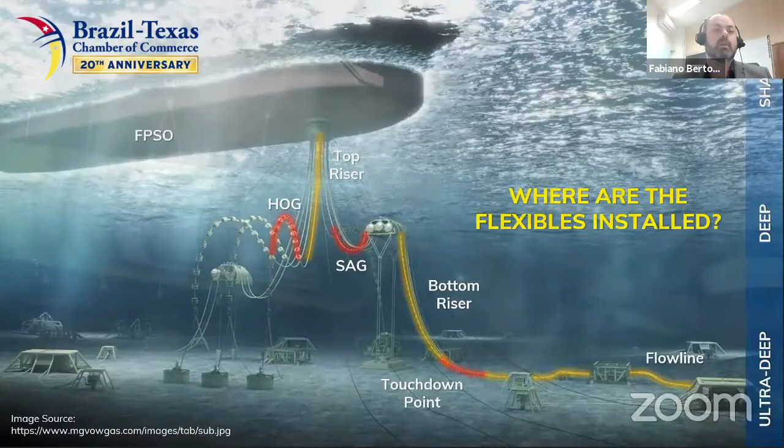Now I would like to show how a common flexible pipe design is. The standard design of flexible pipes consists of metallic and polymeric layers that have their own functionalities. The main pipe layers, explaining going from inside to outside, are: carcass, which is responsible to sustain external pressure; internal pressure sheath, a sealing layer that prevents fluids from coming out; pressure armor, a structural layer that supports internal pressure; tensile armors, in charge of sustaining the axial loads; and external pressure sheath, another sealing layer that prevents fluids from coming in. So the multi-layer pipe structure results in an equipment that has superior structural resistance and leak-proof efficiency for a safe oil and gas production application.

As you may know, despite being seen as field-proven technology, flexible pipes have some vulnerabilities manifested by different failure modes. While most of them are manageable and predictable, some of them still demand further investigation. That is the case for the corrosion and corrosion fatigue failure mechanisms, which can affect the structural metallic layers.

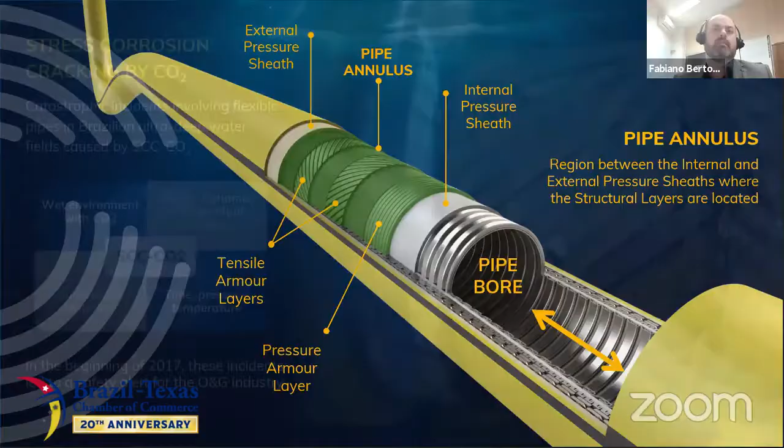Okay, thank you. Let's talk about the main subject of this presentation, SCC CO2. It means stress corrosion cracking by CO2, a failure mechanism well known by the industry.

However, SCC CO2 was not fully mapped by the flexible pipe industry as a critical risk until the recent application in production fields with high CO2. One evidence was the accidents in the Brazilian ultra-deep water fields at the end of 2016 and beginning of 2017 that led the Brazilian National Petroleum Agency, ANP, to issue a safety alert for the industry.

Back then, the first assessment pointed out SCC CO2 as the root cause leading to catastrophic failures of the injection risers and flow lines. As a result, all Brazilian pre-salt oil production was put at risk.

These occurrences sounded an alarm and a call for an industry-wide task force to address some questions such as SCC CO2 mechanism, criticality, and comprehensiveness, and what the boundaries of occurrences are.

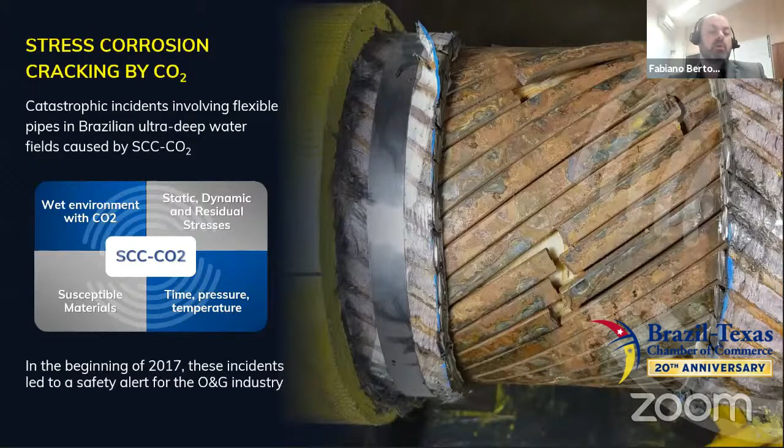Now that you understand what happens in the annulus environment, let me talk a little bit about our solutions to help the industry mitigate the SCC CO2 risk.

SIMEROS is an engineering company for testing, monitoring, and structural integrity solutions of subsea pipe systems. We are leading some initiatives together with the operators Petrogal Brazil, Galp, and Petrobras, and the main pipe manufacturers in order to better understand and carry out actions to pursue the definitive solution to avoid SCC CO2 in unbonded flexible pipes. Here in this slide, you can see a diagram showing how SIMEROS is dealing with the SCC CO2 issue.

Our approach starts with what we call field experience. It can be summarized as initiatives to collect data from retrieved or installed pipes that were exposed to a potential SCC CO2 environment in operation.

SIMEROS understands that field data is a baseline for establishing proper experimental assessment protocols and assertive field monitoring campaigns. Also, the field data corresponds to factual evidence which should be considered as guidance for pipe manufacturers to start the reevaluation of the entire pipe development cycle.

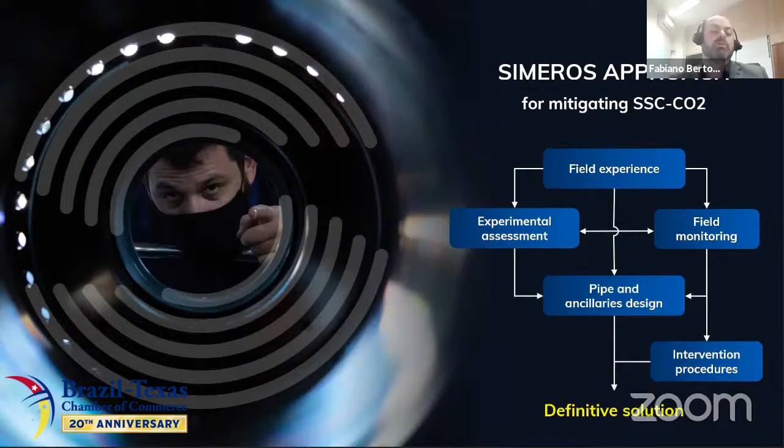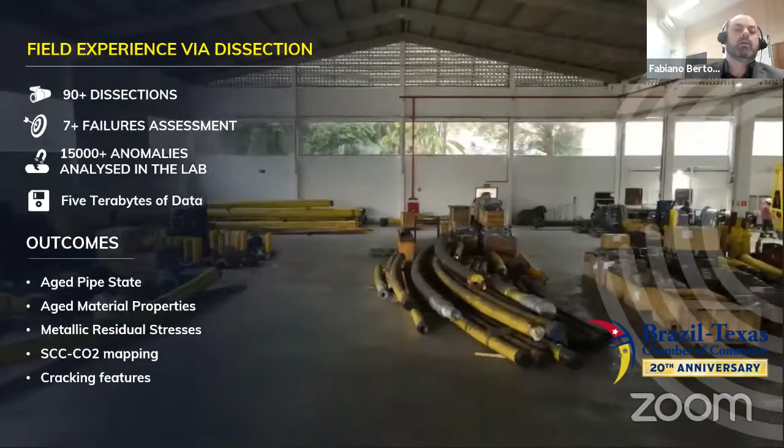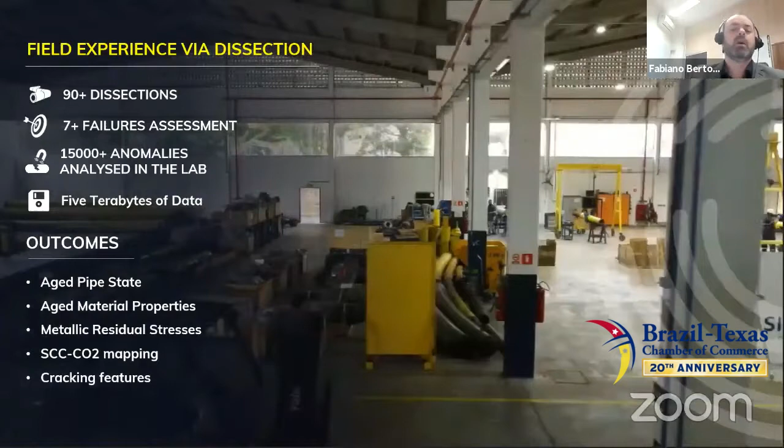Now I will talk a little bit about the pipe dissection program. Pipe dissection program follows SIMEROS approach of field experience basis.

Pipe dissection is an initiative to investigate the SCC CO2 related field occurrences. It's important to mention that SIMEROS has a long-term contract with the main Brazilian operator dedicated to obtain the maximum amount of data from pipes retrieved from fields with high CO2 content.

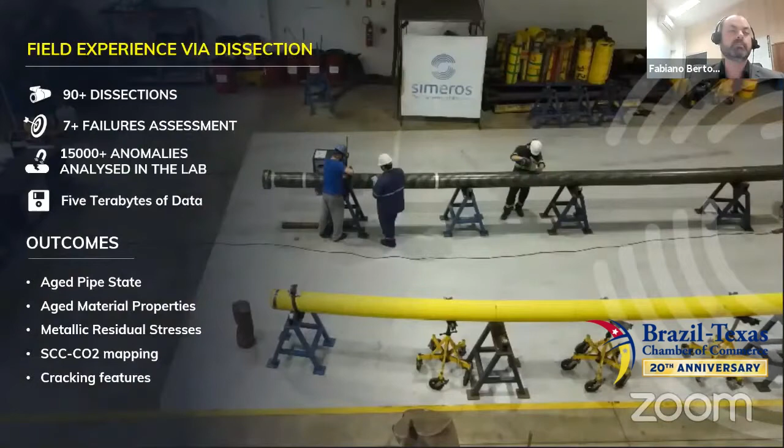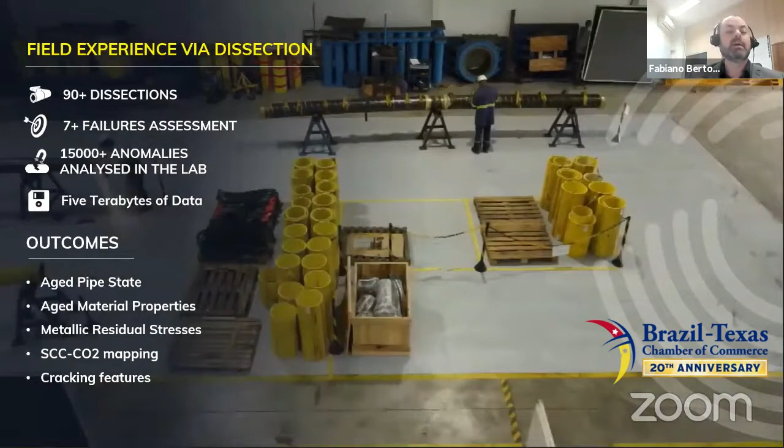First of all, an engineered-based procedure has been developed and implemented to collect information and create a robust database. Then the post-treated data can be cross-linked to evaluate and compare the impact of operational conditions in different pipe structures and applications.

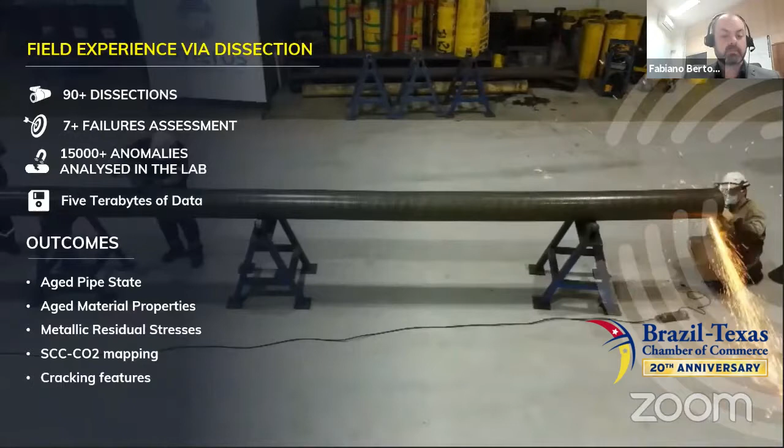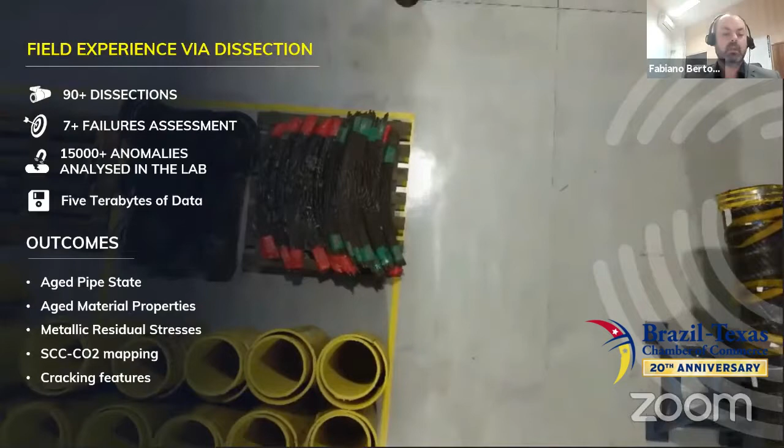The main dissection steps are GVI, general visual inspection, dimensional measurements, non-destructive testing, residual stress measurements, material properties testing, and material characterization. As a result of the dissection process, it's possible to evaluate the aged material properties,

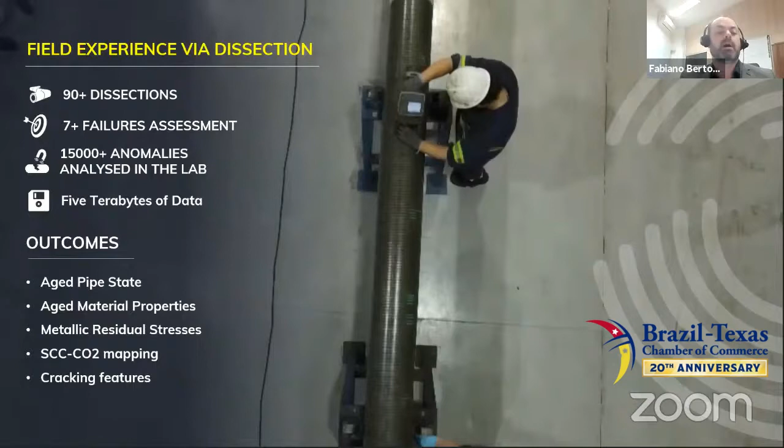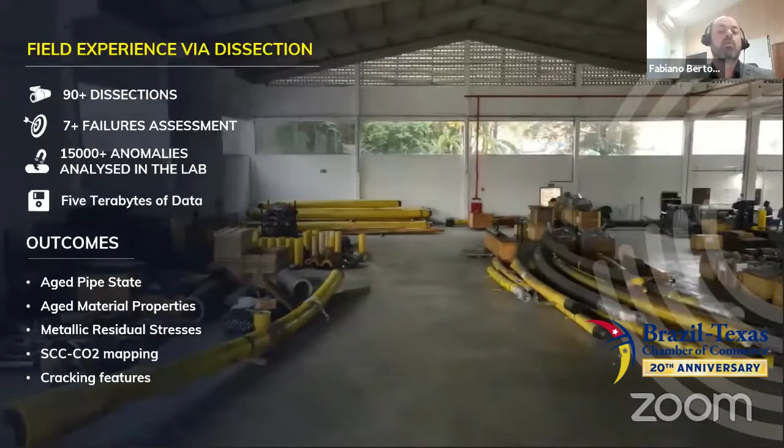to assess the actual residual stress levels in the structural armors arising from pipe manufacturing process and operational loading history, generate a distribution mapping of SCC CO2 occurrences throughout the pipe length, radius, and layers, and generate a statistical data survey regarding the main crack features, such as crack length, shape, position, and others.

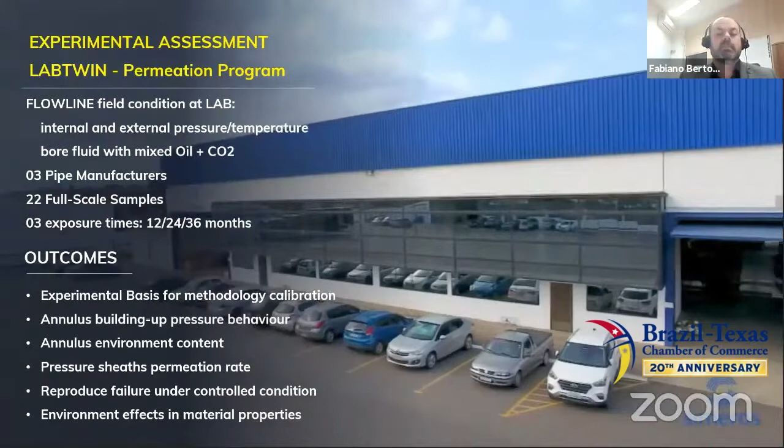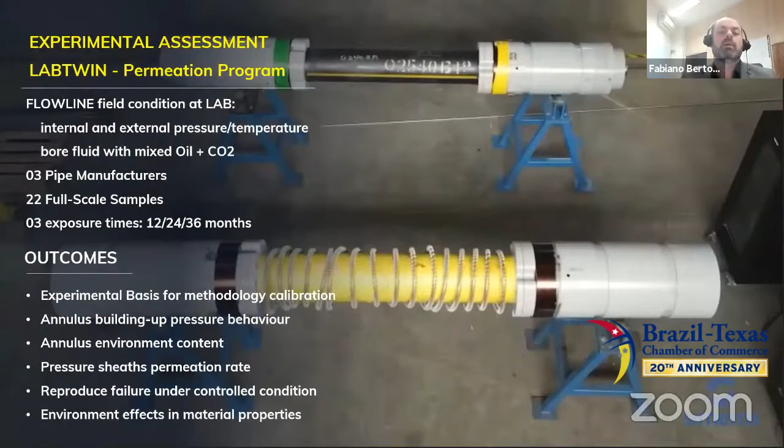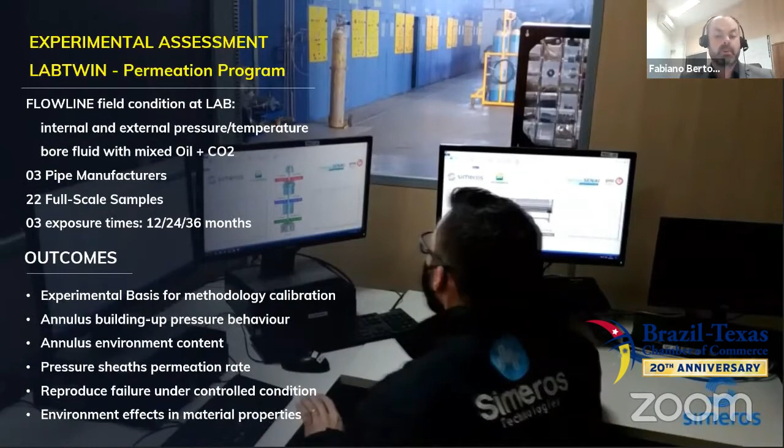Continuing presenting experimental assessment initiatives, this project was born to reproduce as closely as possible the operational field conditions in an industrial lab scale, defined by us as Lab Twin. The primary objective is to develop SCC CO2 degradation mechanism in a controlled environment. The initiative aims to shed light on complex gas permeation properties that take place in the annulus boundaries, remembering that the annulus is the region enclosed between the internal and external sealing barriers.

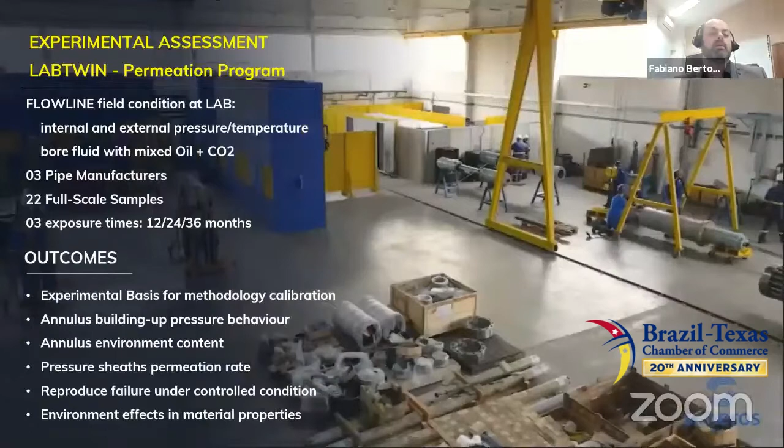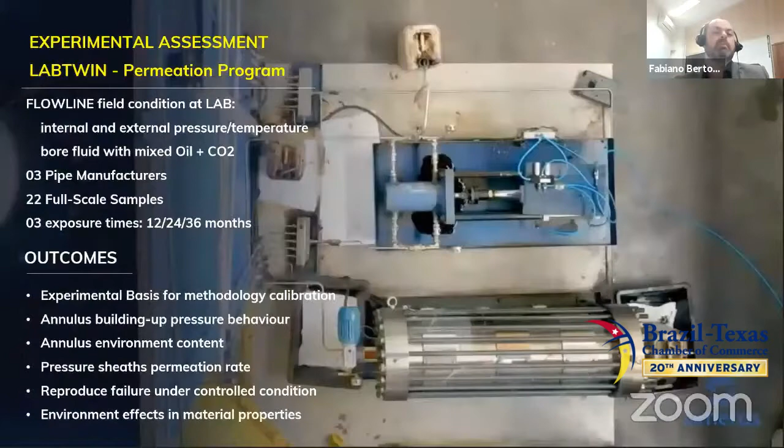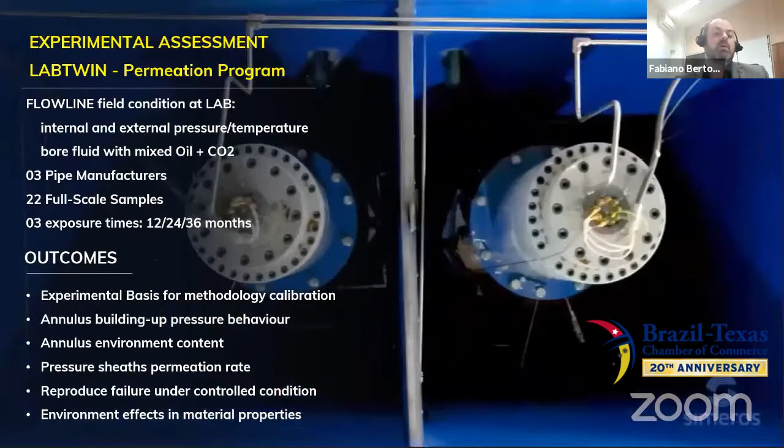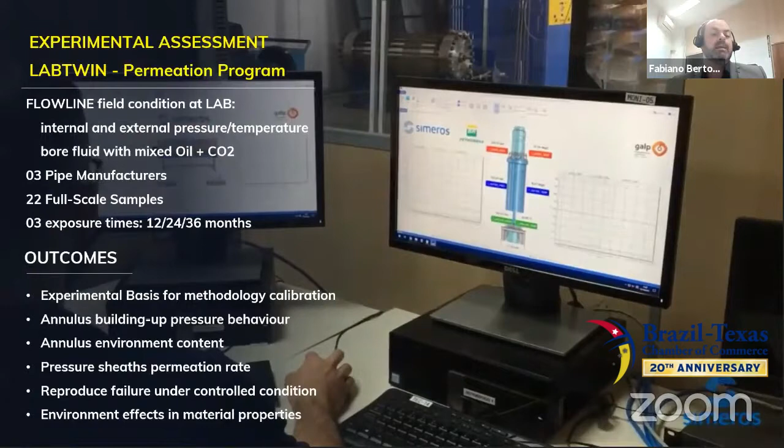Along with our partners, SIMEROS is carrying out the challenging task of assembling 22 full-scale samples in a LABTWIN setup, where the pipes are submitted to near real flow line field conditions. The LABTWIN setup includes controlled bore chemical content, pressure, and temperature, external pipe pressure and temperature. Besides that, the testing matrix considers a combination of 3 different pipe manufacturers with 2 different pipe structures.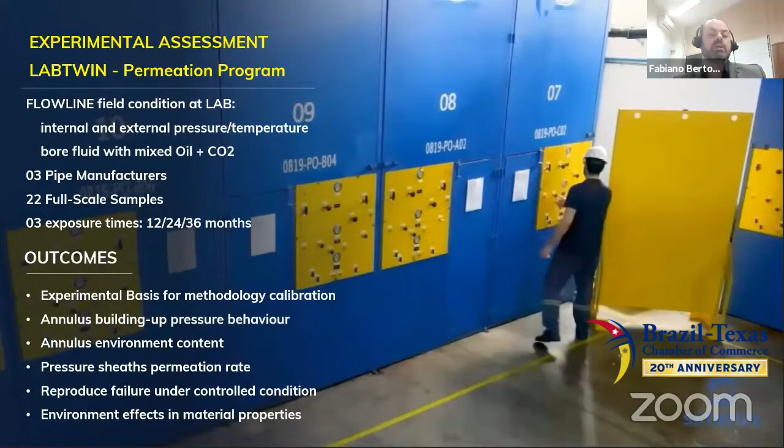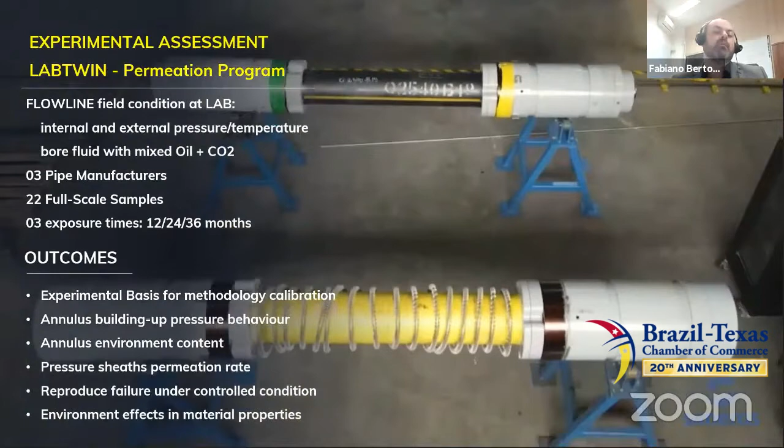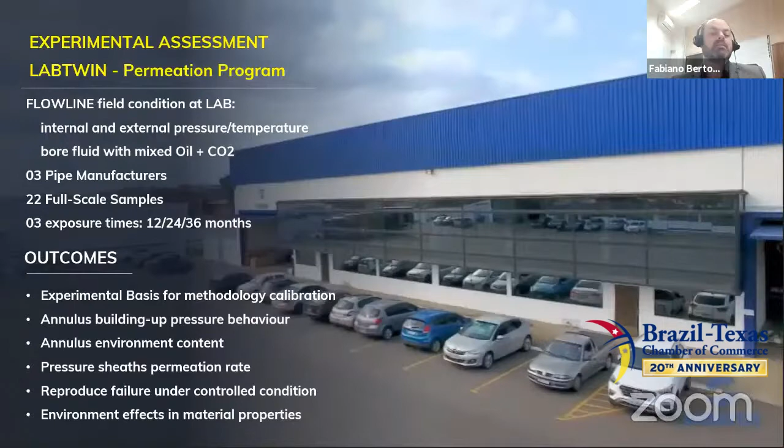These represent production and gas injection applications, and also 3 different aging times: 12, 24, and 36 months. The proposed setup will result in a permeation process that will deliver a characteristic field annulus environment for each sample under laboratory monitoring. The project includes protocols for laboratory instrumentation, monitoring, and dissection procedures in order to obtain the maximum expected results.

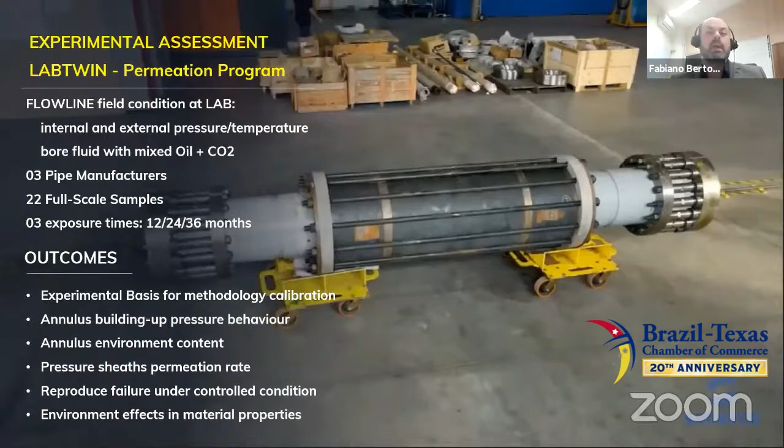The most relevant outcome is related to the generation of experimental basis to calibrate permeation models based on annulus build-up pressure behavior, annulus environment content throughout the exposure time, and pressure sheath permeation rate.

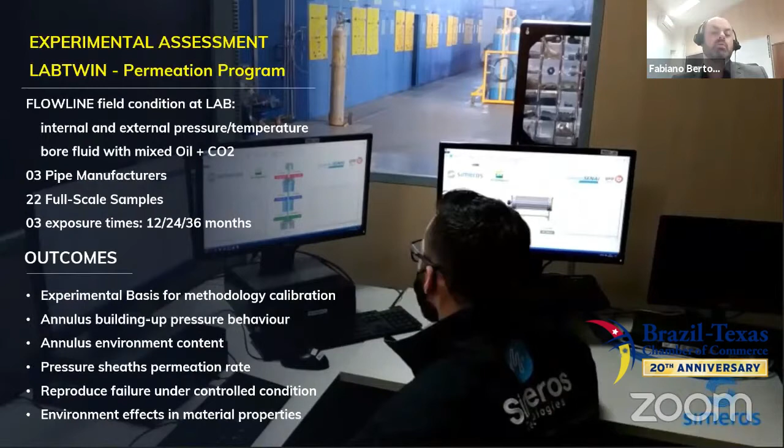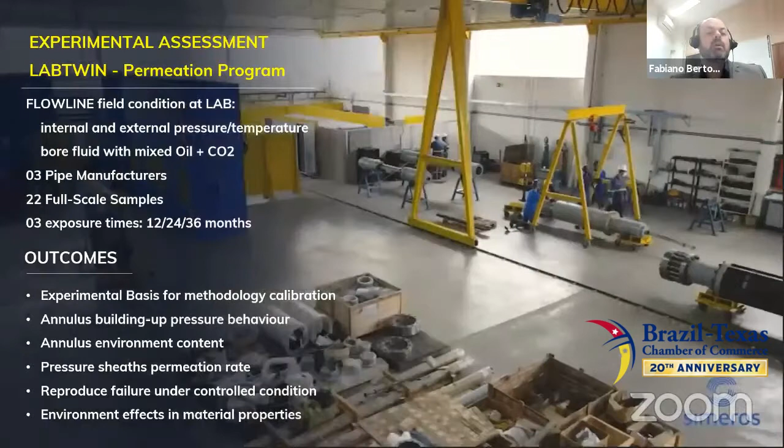Additionally, the project aims to reproduce the SCC CO2 failure mode in the lab under controlled conditions, from initiation until failure. Finally, an evaluation about the effect of the harsh environment on the pipe layer material at different aging levels will be done.

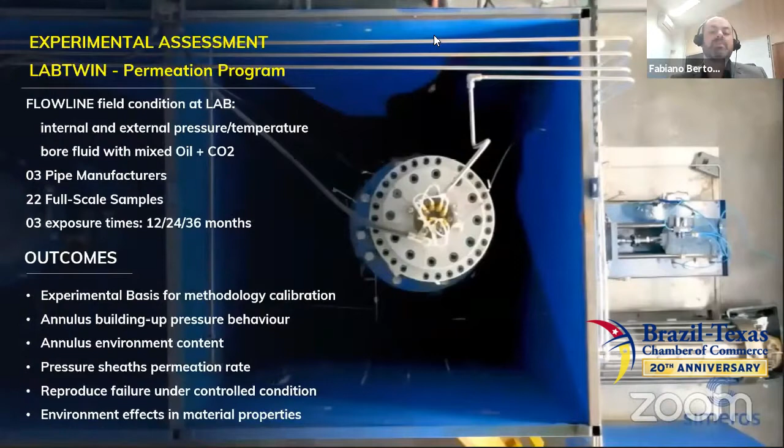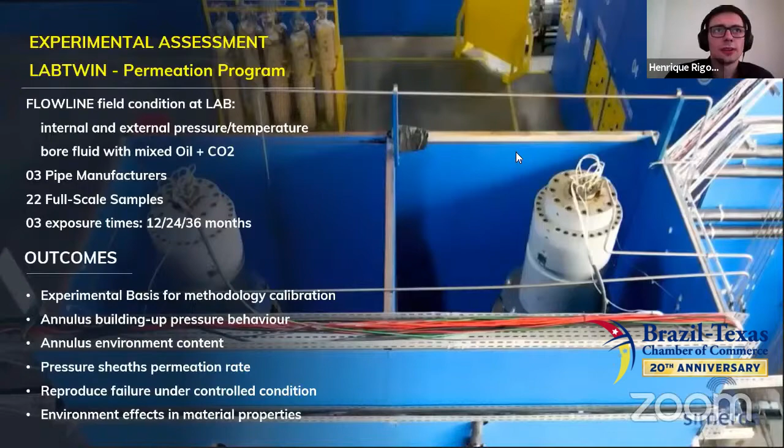Hello, everyone. Following the mentioned initiatives in experimental assessment, SIMEROS is investigating the relationship between SCC CO2 and dynamic loads. SCC damage can be exacerbated by other failure mechanisms, which represents one of the major concerns in the industry. The main concern is that SCC CO2 can quickly initiate damage, which, combined with dynamic loads, may speed up the damage propagation up to catastrophic failure of the structural armor layers. This scenario compromises the safety of dynamic risers operating under high CO2 content, especially when annular flooding is a possibility.

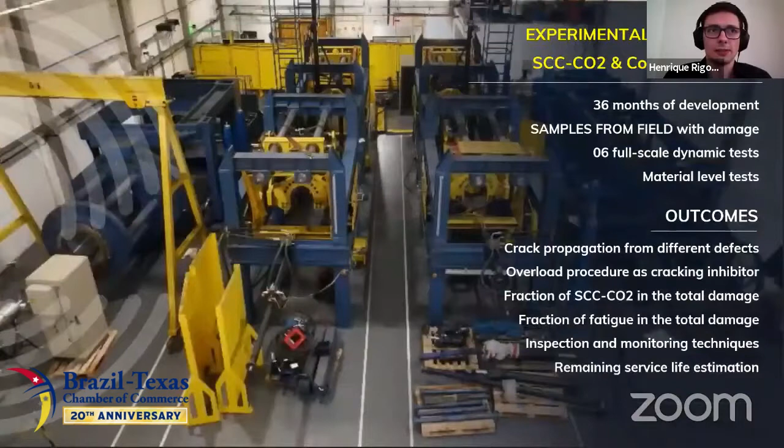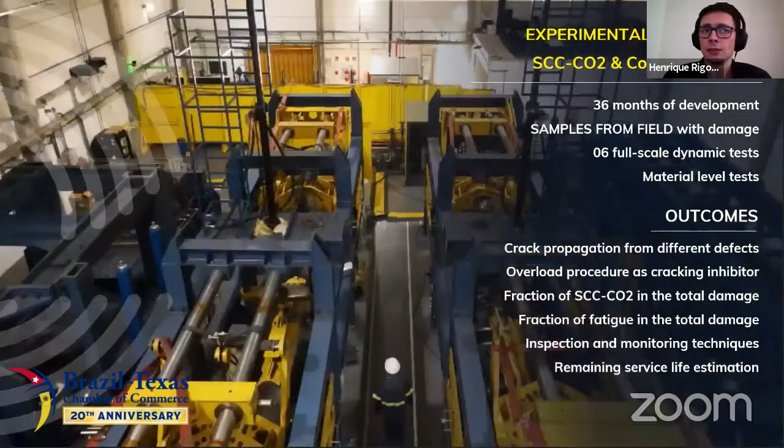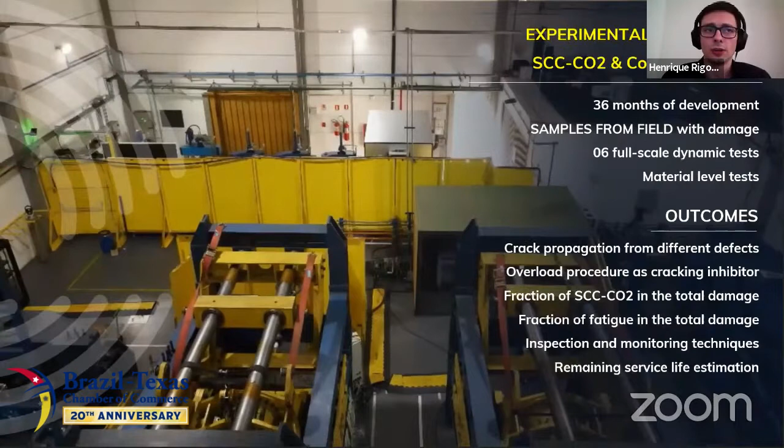We created a project to address these issues, which is a joint effort among Petrogal Brazil, Galp, Petrobras, and SIMEROS. The scope of this project is to perform 6 full-scale tests and a set of material level analysis within 36 months. Pipe samples that were exposed to SCC CO2 during operation were retrieved from the field and will be the core study of this project.

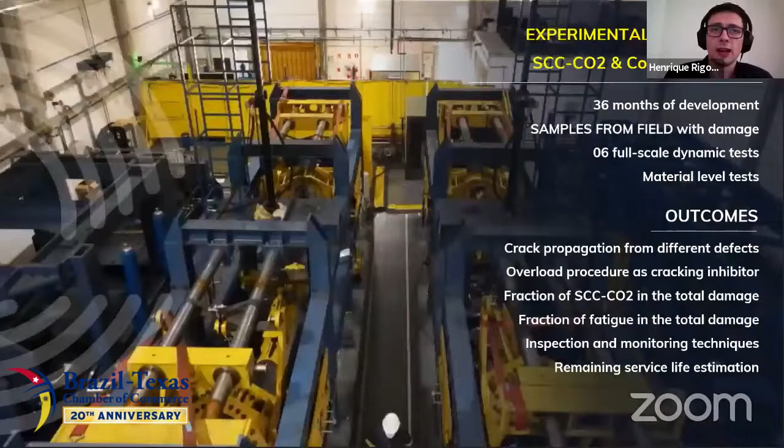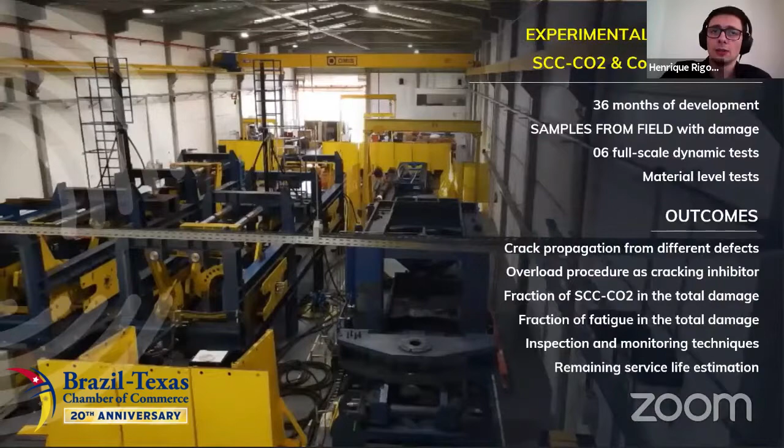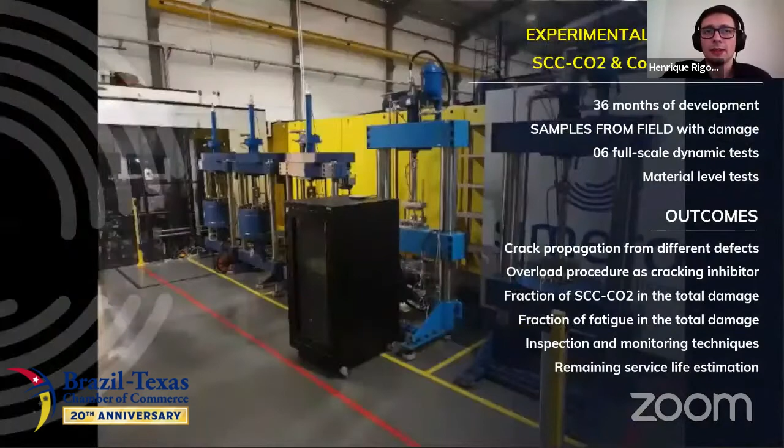These pipes have a high probability of having damage initiation in the structural layers due to the SCC CO2 phenomenon. A dissection process takes place after receiving the samples in order to evaluate the actual degradation state of the structural armors and to confirm the predicted damage. The dissection then delivers a complete defect mapping that is the basis for the following steps of the project.

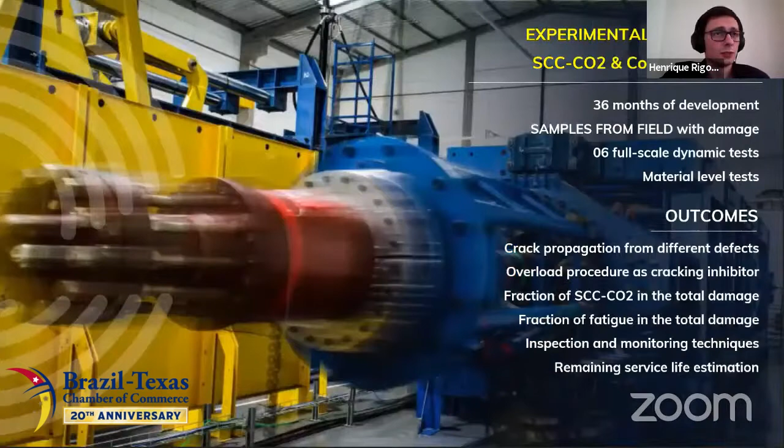After the dissection of the retrieved pipes, we will carry out several experimental assessment campaigns, from material level up to full-scale tests. The goals of these campaigns are to evaluate the crack propagation rate in the presence of different types of defects, and to explore the effect of overload cycles as an option to inhibit crack propagation in the field.

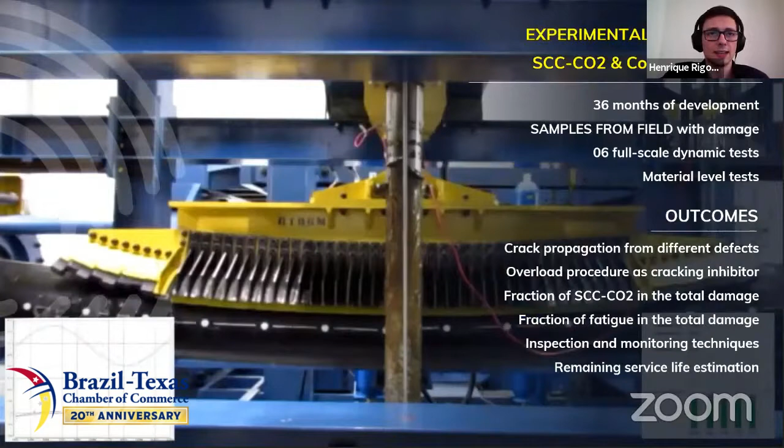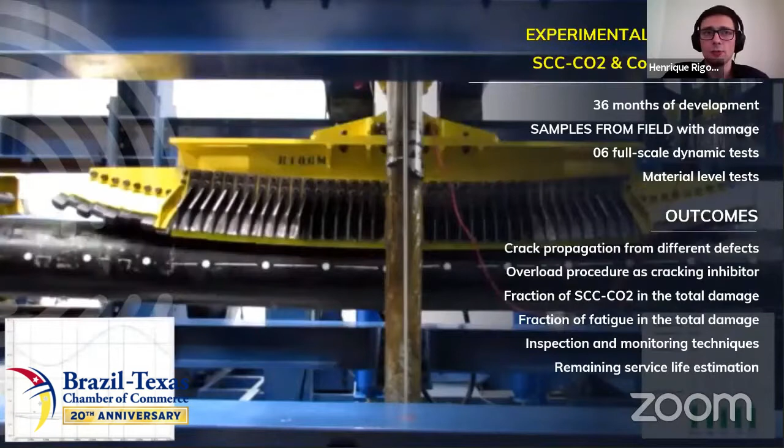We also aim to develop and implement inspection and monitoring techniques that can detect the presence and growth of defects, to investigate and measure the proportion of damage due to SCC CO2 versus the proportion due to fatigue corrosion, to estimate the remaining service life, and also to update the safety factors from the dynamic test data.

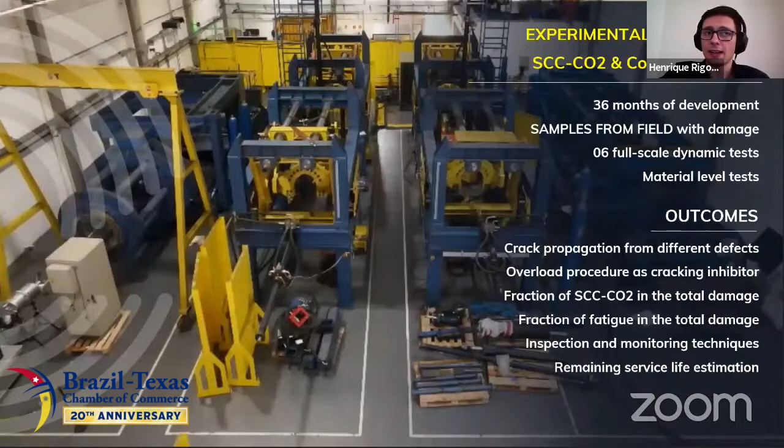This project started at the beginning of this year, and we are currently at the commissioning phase of the testing program.

I will now briefly present the solutions that SIMEROS can offer today for the oil and gas market to mitigate the SCC CO2 issue.

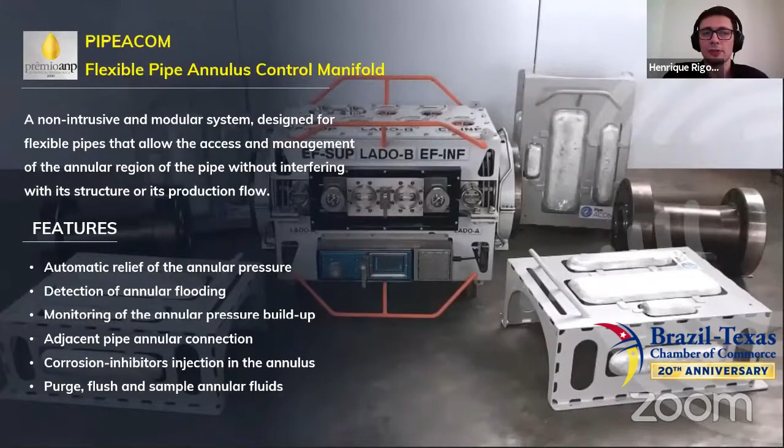PIPEACOM stands for Flexible Pipe Annulus Control Manifold. It is a non-intrusive and modular system designed for unbonded flexible pipes that allow the access and management of the annular region of the pipe without interfering with its structure or its production flow. The system was born to address one of the many flexible pipe weaknesses, that is the premature corrosion of structural layers due to the unknown annular environment that forms during operation.

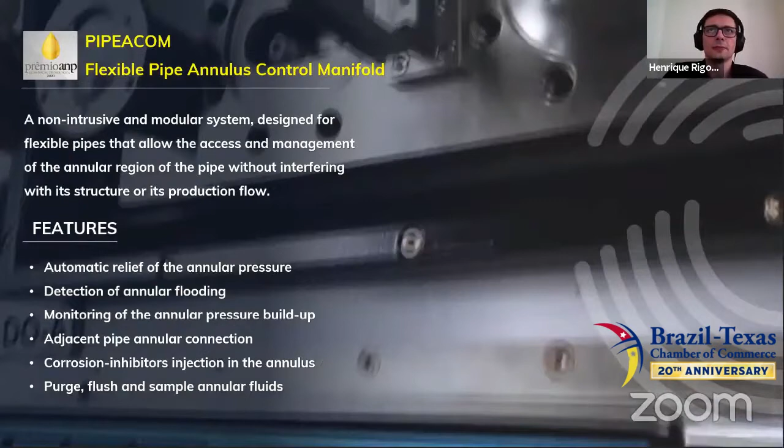Together with Petrogal Brasil, Galp, and Petrobras, SIMEROS went from concept design to a fully operational prototype within only 18 months, qualified to operate in ultra-deep seawater levels of external pressure.

The PIPEACOM system is installed between two end fittings without requiring any modification of either end fitting or flexible pipe. Its circuit is connected to the adjacent annular regions, allowing for complete control of its flow.

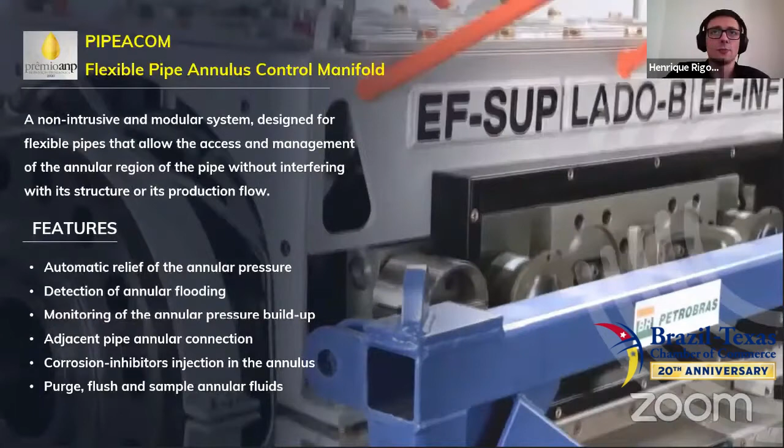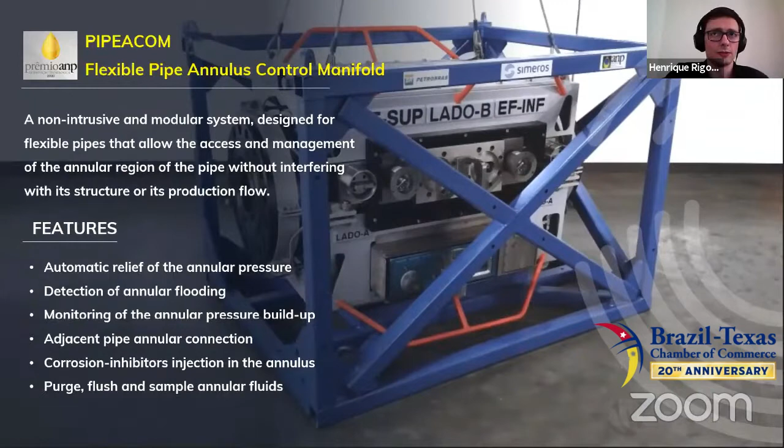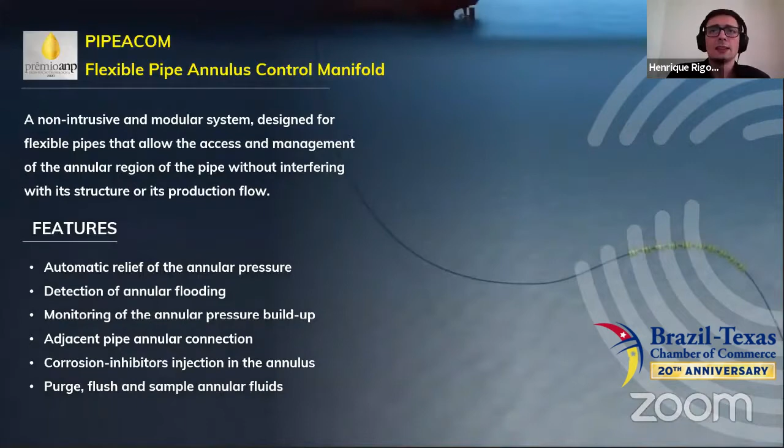With a privileged annular access, the PIPEACOM system can provide innovative features during operation without interfering with the production flow, such as an automatic relief of the annular pressure, the detection of annular flooding, the monitoring of the annular pressure buildup, the connection of the annular regions of adjacent pipe segments, allowing for a unifilar annular circuit, the injection of corrosion inhibitors in the annulus, the purge and flushing of the corrosive environment in the annular region, and the sampling of annular fluids for further content analysis, such as chemical composition and permeation analysis.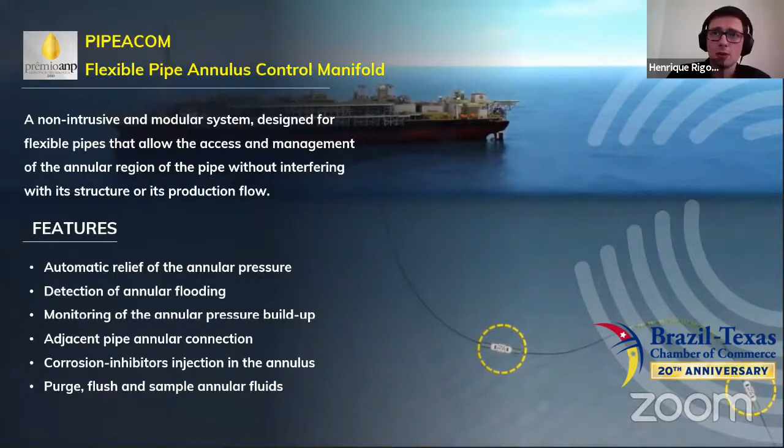The PIPEACOM system was built with reliability and safety in mind, fully compliant with the best practices and standardized subsea systems, with redundant flow control valves and barriers to guarantee water tightness during operation, and a maintenance-friendly interface with fully replaceable safety components and monitoring gauges, all compliant with standard ROV tools.

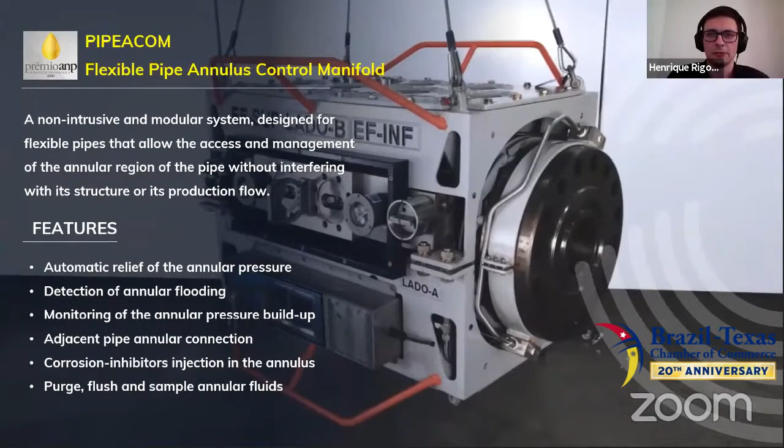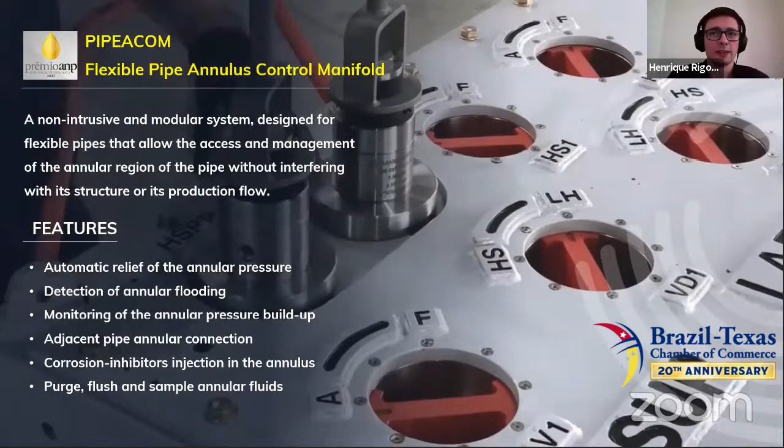After going through strict laboratory qualification tests, the PIPEACOM system is ready for deployment and will be installed in Petrobras P66 platform, located in the Brazilian pre-salt fields, later this month. PIPEACOM will connect two flow line segments under 2,300 meters of water depth.

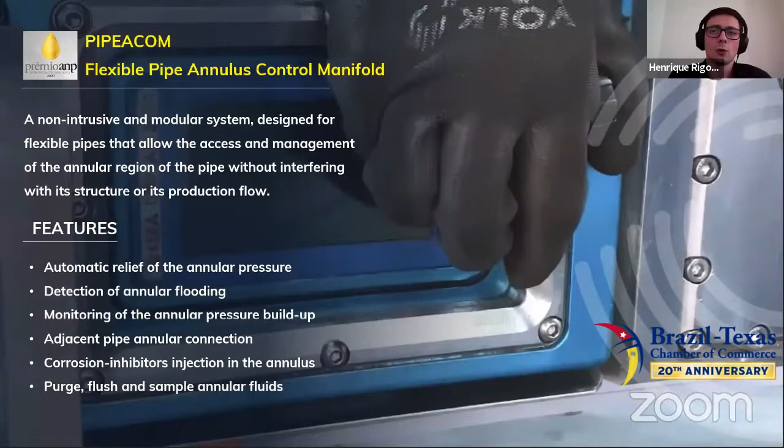This project was so well received from the market that SIMEROS is a nominee for the National Petroleum Agency Technological Innovation Award, the main oil and gas innovation recognition in Brazil.

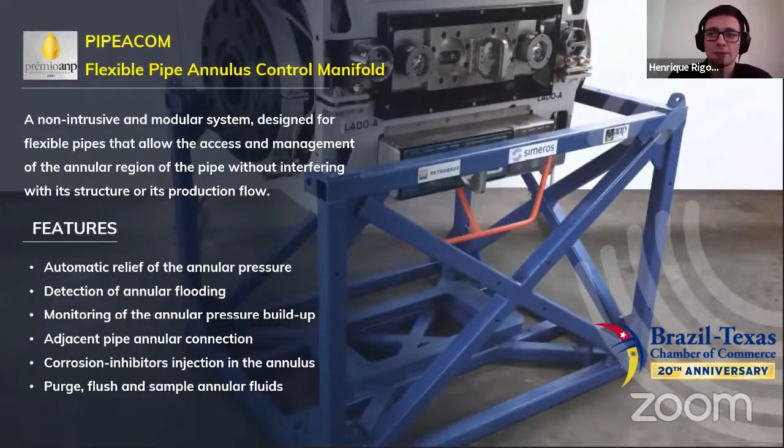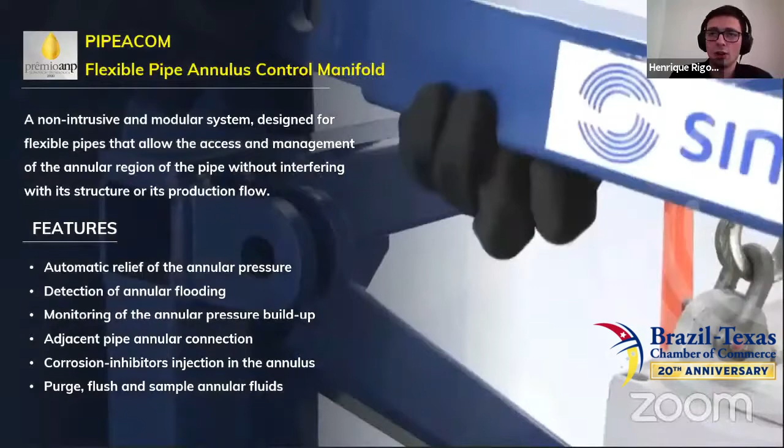PIPEACOM is an independent ancillary device that is attached in completed pipes onshore or offshore bases. SIMEROS already developed a permanent solution for pipe monitoring, including all of the PIPEACOM features, together with pipe structural integrity monitoring.

This is SIMEROS Smart End Fittings. All of the PIPEACOM technology is embedded in our proprietary Smart End Fitting solution. SIMEROS Smart End Fittings is a result of years of research and development.

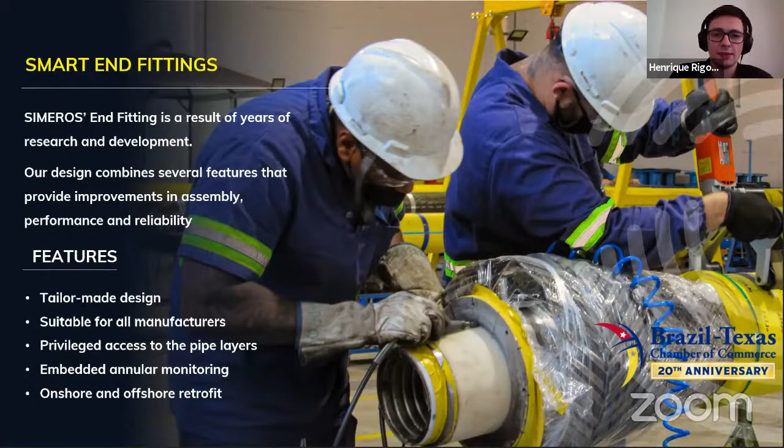With a privileged access to the pipe layers during assembly, SIMEROS end fitting enable a direct and proper instrumentation of the pipe layers and annular environment. It is a key component for the forefront structural integrity assessment of subsea flexible pipes, a valuable technology to monitor the service life consumption of offshore assets.

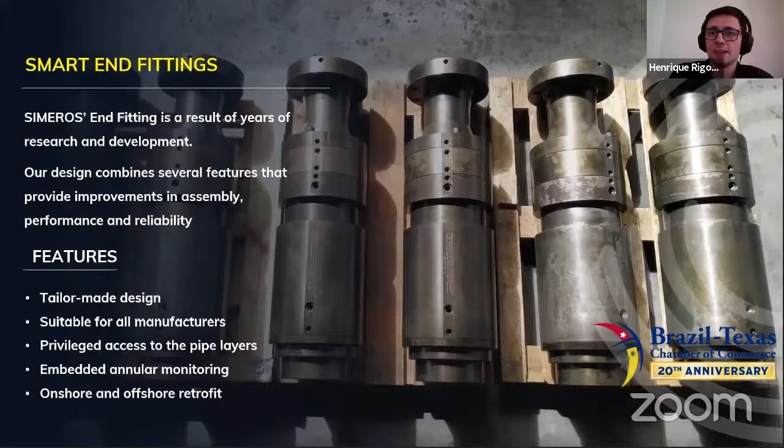Since our end fittings are tailor-made for the application, they can be installed on any flexible pipe of any manufacturer in both onshore and offshore bases.

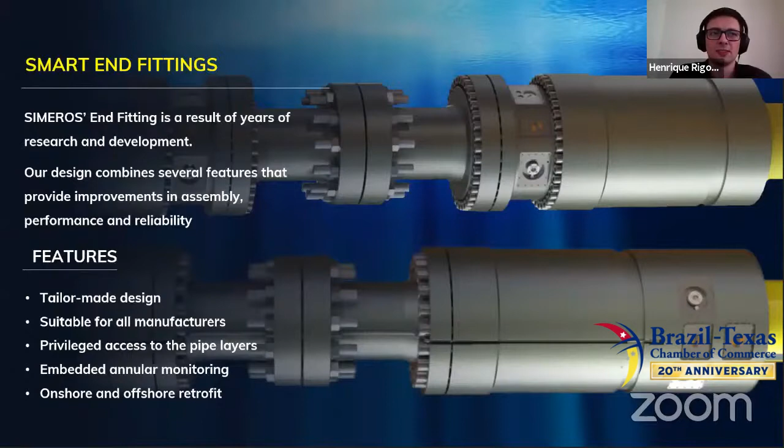Following our initiatives for field monitoring, SIMEROS has introduced to the market a solution for top riser annulus inspection and monitoring, MATS, the Mobile Annular Testing System. MATS allows a real-time survey of the top riser annulus.

MATS offers several features, such as the annular integrity assessment, annular free volume measurements, a permeation rate analysis, sampling and chemical content identification, and injection of corrosion inhibitors.

These services can be performed in several different stages of the pipe's life, from installation up to its retrieval, with a periodic assessment done according to the risks identified in operation.

Currently, MATS is running a permeation assessment campaign, monitoring risers that can be subjected to the presence of CO2 in pre-salt fields, one of the ingredients of stress corrosion cracking failure mechanism.

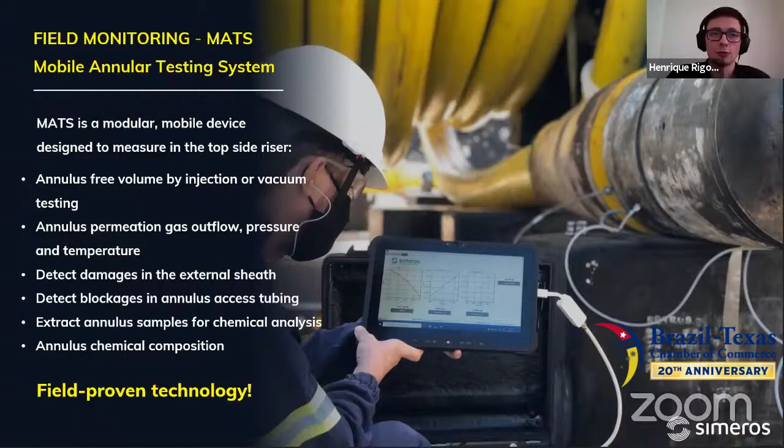Inspection and monitoring techniques are powerful tools to assess the structural integrity of flexible pipes. However, such techniques are heavily dependent on an accurate calibration. Due to the suitable environment created by the set of ongoing activities, SIMEROS has a unique positioning to increase the pipe understanding through testing and dissection procedures, resulting in opportunities to improve the available techniques or calibrate new ones.

To have an idea, in the next 2 years, SIMEROS has over 150 opportunities to perform inspections and monitoring inside of our dissections and full-scale test programs. We are receiving different retrieved pipe structures with field-initiated defects, and we're using them to calibrate inspection and monitoring techniques that are currently under development. We challenge our specialists to predict the pipe state before the dissection takes place.

After the dissection, the results are then used to validate the inspection prediction and to support deviation and adjustments. The majority of tests that SIMEROS has performed are destructive, meaning they subject the flexible pipe to loading conditions that lead the pipe to failure. Each event is registered and characterized as a signature of the pipe failure behavior. All treated information forms a solid database with failure signatures that allow us to better understand the field data coming from implemented inspection and monitoring systems, and is a baseline to improve procedures and develop new techniques.

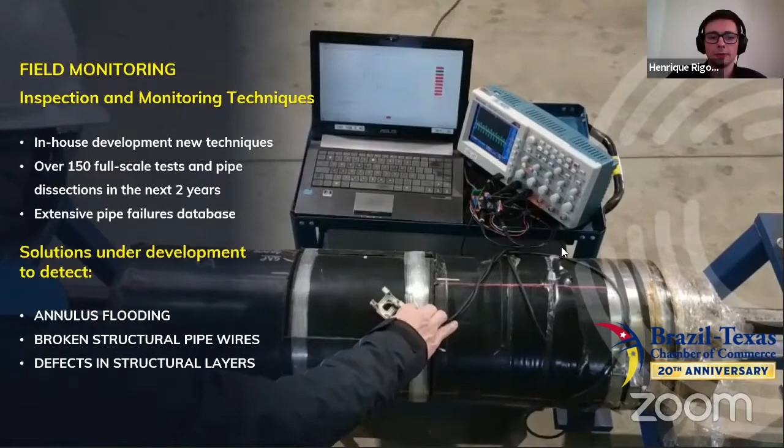In order to further help improve the safety of the oil and gas industry with regards to the SCC CO2 phenomenon, SIMEROS is assisting the technical review of international flexible pipe standards, API 17J and 17B. In combination with our know-how and technical board, we are helping to consolidate the knowledge acquired so far by addressing this critical failure mode of unbonded flexible pipes.

In this sense, SIMEROS is carrying out some initiatives regarding pipe design, such as numerical models for gas diffusion in sealing polymer layers, and annular environment development prediction through our in-house software. Local analysis to accurately identify the stress state of structural layers, combined with fracture mechanics, to better estimate the remaining service life and safety factors.

We also have a step forward in material selection to minimize the polymer permeation and improve metallic resistance against corrosion. And finally, we have new pipe design concept propositions that are a result of all of our other initiatives.

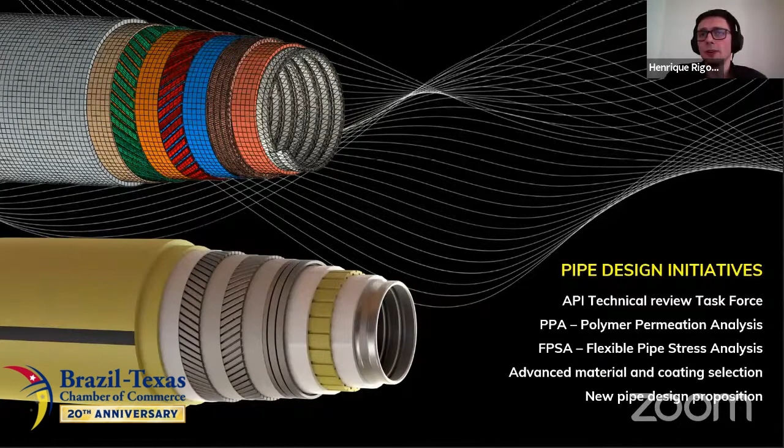Now I will pass back the stage to my colleague Fabiano for a few concluding words. Thank you very much.